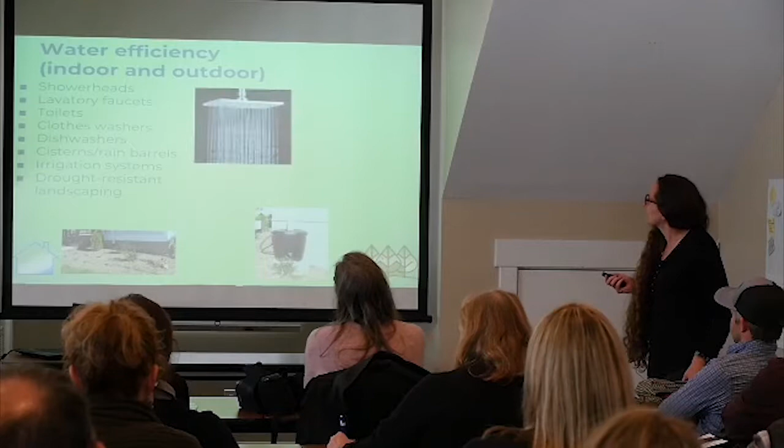The next category is water efficiency. I have some pictures—some things I like and some things I don't like. The rain head shower head is something that frustrates me. As you may have noticed, I have really long hair. If I can rinse my hair with a low flow shower head, everyone can.

I was just having this conversation with a builder the other day because they said homeowners have this idea that they need a lot of gallons per minute to get clean in the shower. In reality, when I travel, if I have to go somewhere with high flow fixtures, I actually don't like to wash my hair there, because low flow fixtures achieve low flow by building up more pressure. So you actually get a higher pressure wash, and it's easier to rinse out my very long hair. These rain heads look pretty and people like the idea of them, but they're not particularly forceful, so they're not great for rinsing. They also, because they use so much water, aerosolize a lot of steam. In homes where homeowners insist on using something like that, you'll start to get window condensation in the wintertime because their houses are getting so humid from this high flow fixture. So using low flow efficient fixtures is important.

Shower heads matter the most because you're wasting both water and energy. Showering uses a high percentage of the hot water that most homes use. A standard shower head is probably 2 to 2.5 gallons per minute.

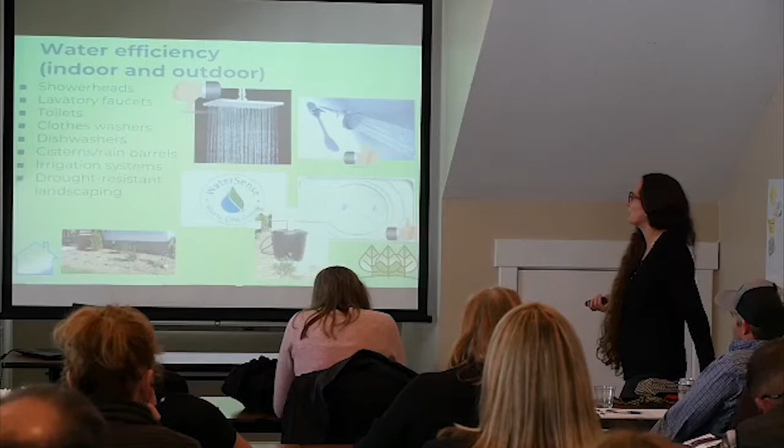That also means educating your designer, if you're working with an interior designer or a third-party design partner like Ferguson's. You want to remind your rep that you want to use low flow. It seems like the more money people spend on fixtures, the less efficient they are generally. That doesn't always have to be the case - if your designer does research upfront, and is good at steering clients, and you give them the budget, that helps. Again, it's not always the end all.

What I found is the worst scenario for these fixtures is when your client goes online and buys a fixture from China from a website. There's no warranty, and no rating, no way to know what the flow rate is. They're not labeled, so that immediately takes you out of the point category where you've got to get available points anyway. So steer your clients away from shopping for themselves in every situation, but especially with fixtures online. Good luck - there are high end fixtures that are efficient.

Not that I've found a rain head yet that's very efficient. There are some rain heads that aren't as bad as others - I've seen 2.5 gallons per minute, maybe even 2 gallons per minute. So you just want to be careful with those.

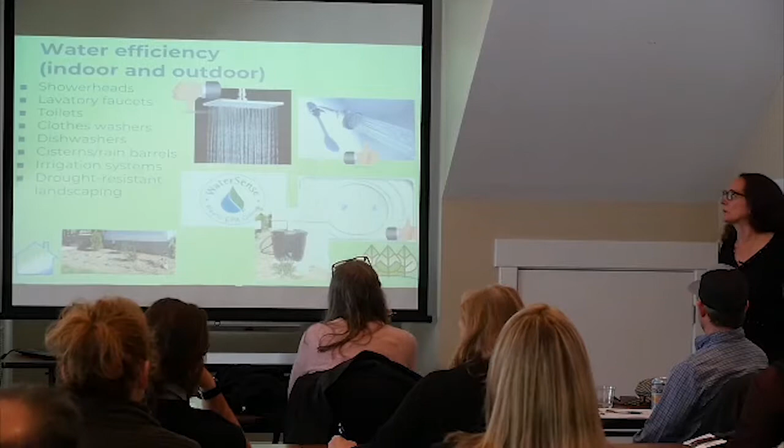Same thing with dishwashers. If you're going to have an irrigation system, having one that can use rainwater from, usually at that point, a cistern - because these rain barrels are great, especially for a hobbyist, but if you're doing much landscape watering and we get a dry spell, they don't last long. So I've got a 3,000 gallon cistern at my house that I flush toilets with and use for landscaping. Most of the time it's completely full and overflowing, but if we get a dry month, I can use the whole thing - I have used the whole thing.

Personally, I think rain barrels are still on that borderline greenwashing kind of aspect, because in an area that is relatively water rich with the amount of rainfall that we get, when we do have a drought, you use them so quickly that it doesn't really make any big impact. And the embodied energy, especially of the plastic rain barrels overall, has got to be far higher than any environmental improvement or reduction.

I think it just depends how you use them. There are some recycled, upcycled options. The right way to look at a rain barrel is if you've got somebody on an infill lot in town who has a couple of raised beds for vegetables, where they're actually going to water them pretty regularly, even during times when we're getting rain, then that's what you use it for, and you supplement with city water if it really doesn't rain for a month. That's the right way to look at rain barrels. But if you're serious about having an actual irrigation system and doing a lot with it, you need to be looking at probably 3,000 to 5,000 gallons, not a 50 gallon cistern or rain barrel.

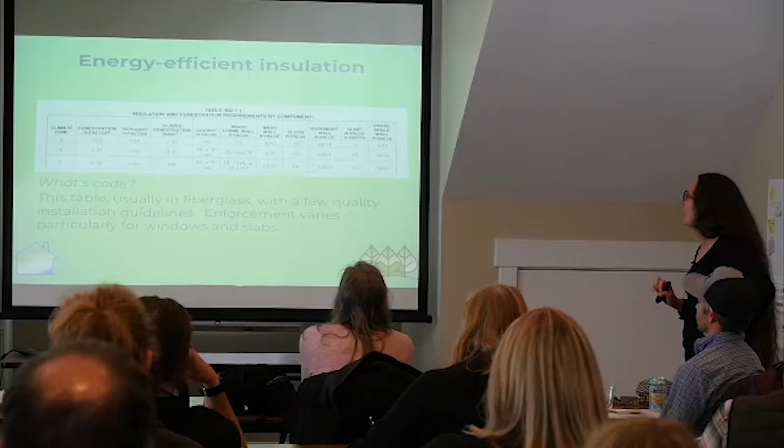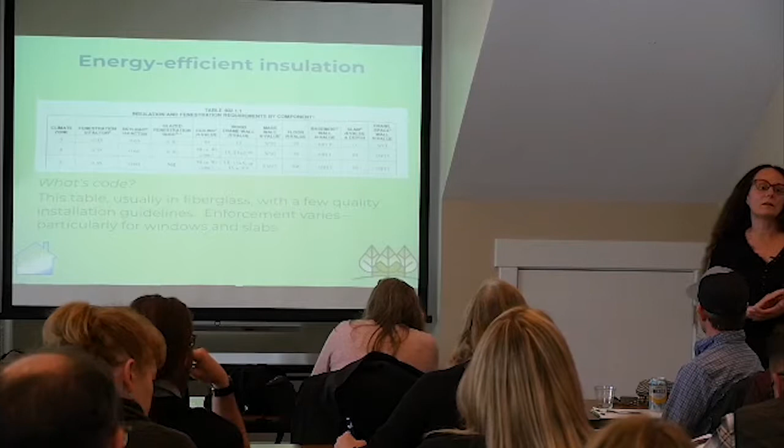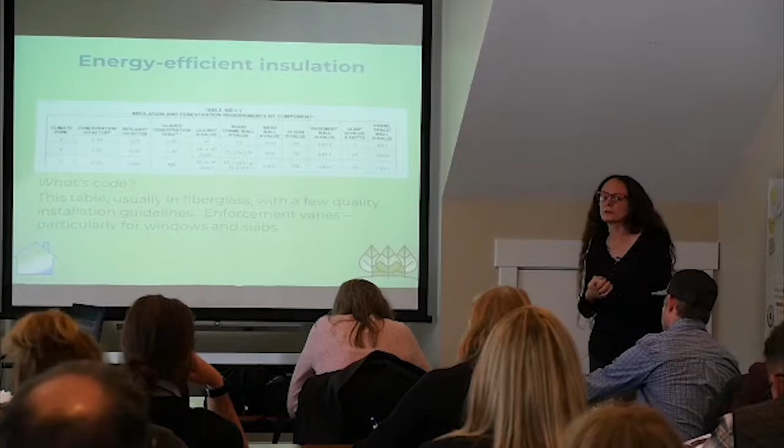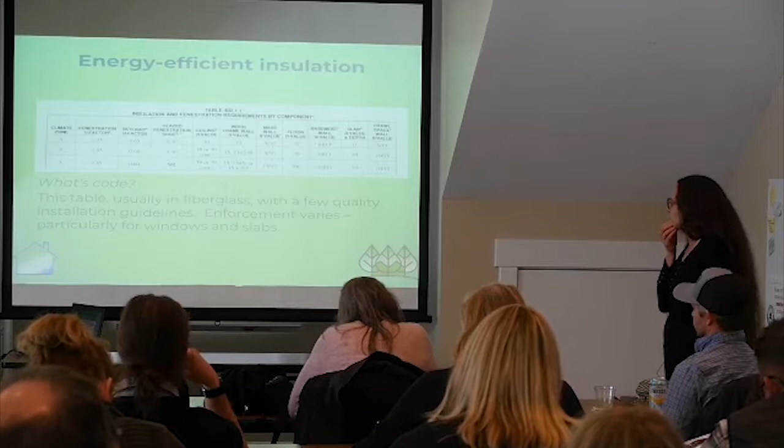So if you're just building to code, you're going to get what's on this table, usually done with fiberglass insulation, with very few quality installation guidelines. All insulation is really sensitive to how well it's installed. You're not going to get the rated performance out of it unless it's installed well. Fiberglass in particular is probably more vulnerable to poor installation than other insulations, although all insulations need to be installed correctly to work well. So one of the things that green building adds is we're looking at how well it's installed.

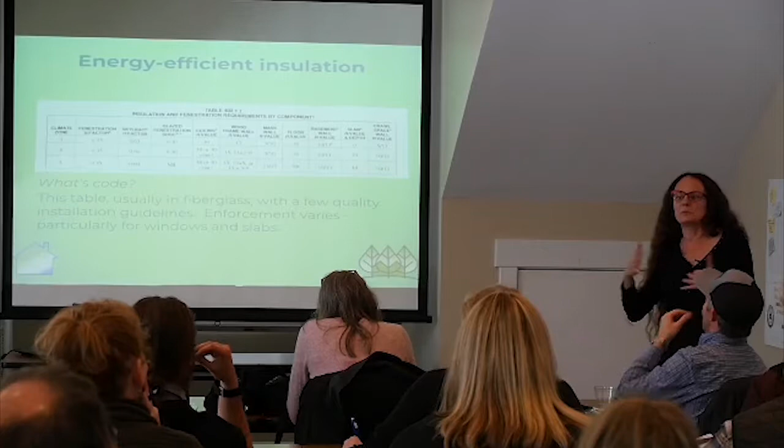And the codes have started to trickle some of this in. So for those of you who are builders, a few years ago they started requiring air barriers on fiberglass and cellulose. That's a how-well-it's-installed issue, and that came from the green programs. We had been requiring that for 10 years, and it became such a thing, it became pretty mainstream. It was pretty cost effective to do, builders knew how to do it, you didn't need exotic supplies, so the code just adopted it.

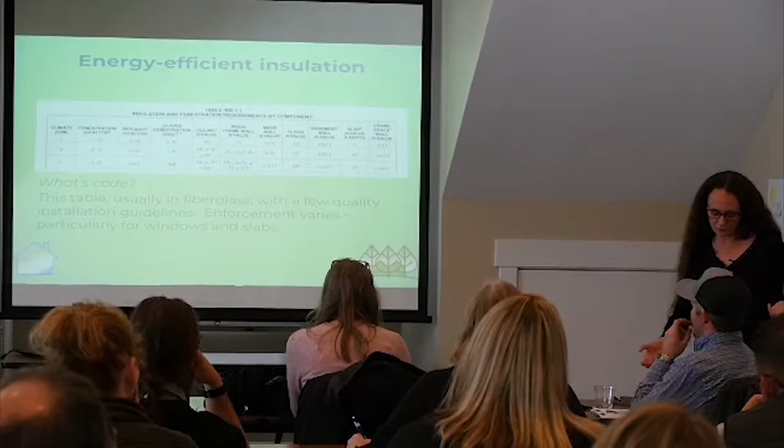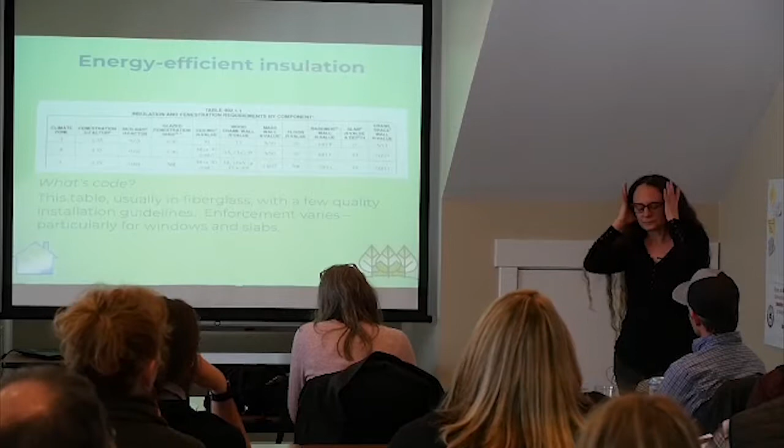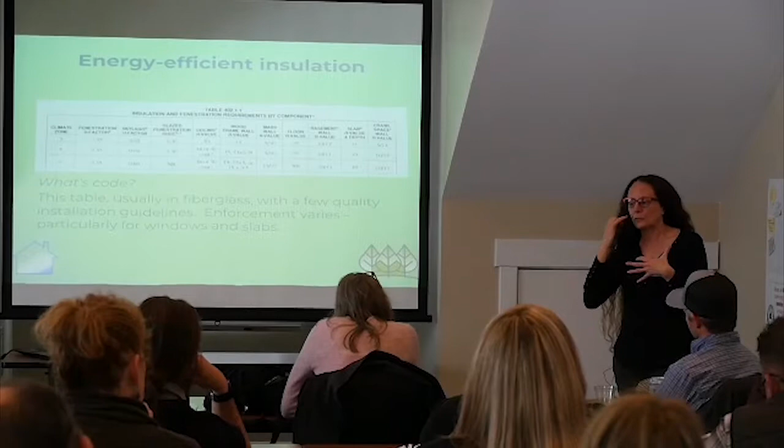How does that work, the air barrier? So fiberglass insulation is like a fleece jacket. You know how if you're wearing a fleece jacket, you're pretty warm until you go out in the wind, and then it doesn't do anything for you? Well, fiberglass insulation is the same thing. As soon as air blows into it, it stops working, just like a fleece jacket does.

So for fiberglass insulation to work properly, it has to be encased on all 6 sides with a hard surface. Normally you've got a stud cavity with 2 pieces of wood and a top and a bottom plate, and then you've got sheathing outside and drywall inside. They're all touching the fiberglass. And as long as that fiberglass is installed to fill the whole cavity and fluffed out, front to back, it's going to work pretty well.

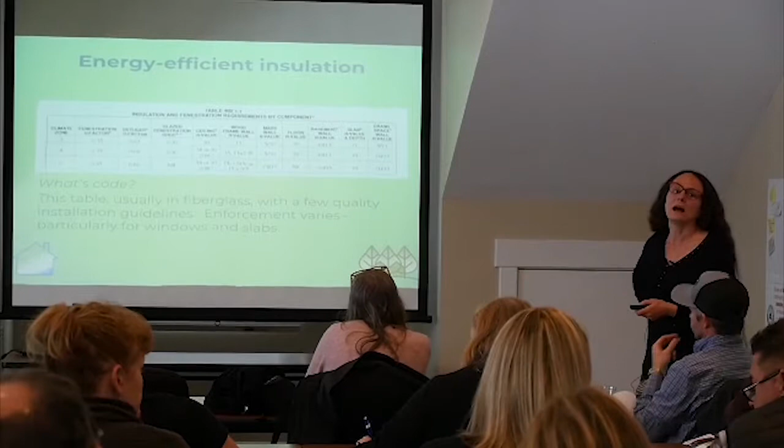But sometimes you have these little cavities in houses that don't get drywall right up against the fiberglass. It happens behind bathtubs, behind fireplaces, under stairs in that little triangular area. And if you don't have a hard surface on the inside, called an air barrier, that fiberglass doesn't work right. So we were always requiring that hard surface on the inside, and eventually code caught up to us. So now if you're a builder, you've got to do that.

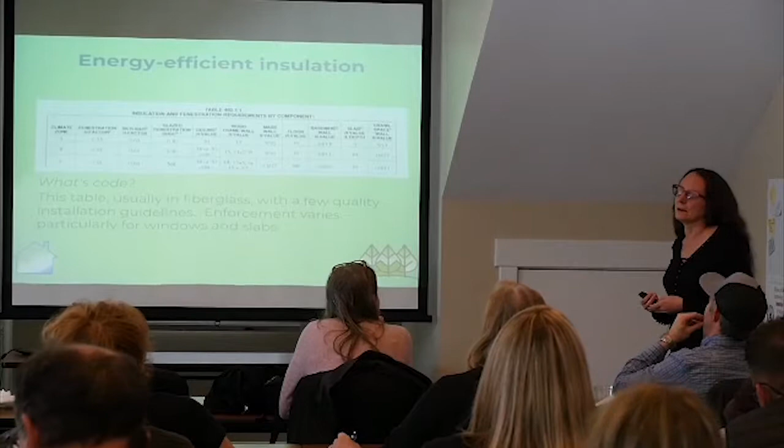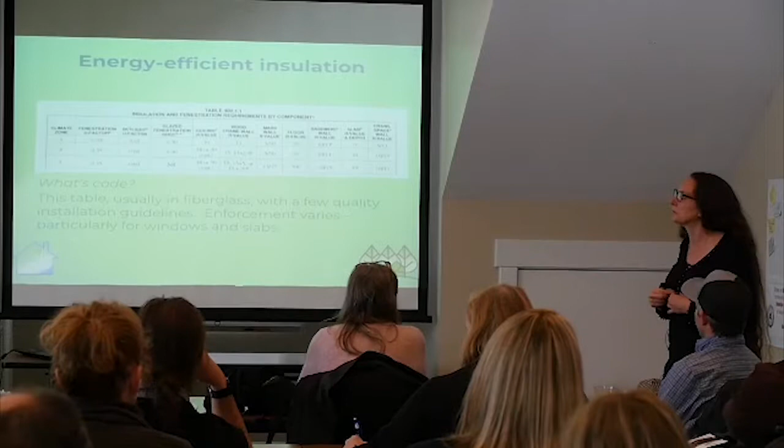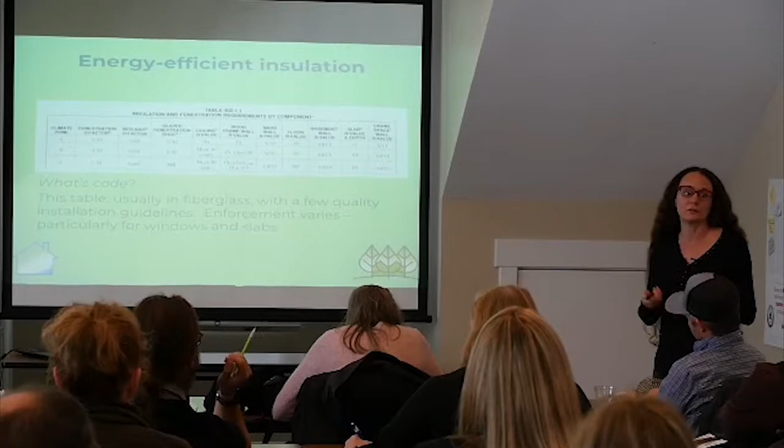Enforcement in the code also varies. So I do on my inspections tag people for things that the code official should have tagged them for. Part of it is I have a different checklist, and I look for some additional things that they're not looking for yet. But I would say the 2 things on this chart that I most tag people for that the code official didn't are windows — the solar heat gain coefficient on windows is something that code officials often don't look at, but should — and slabs. There's a requirement to vertically cover the slab edge with insulation that is in the code that doesn't get done if you're not certifying.

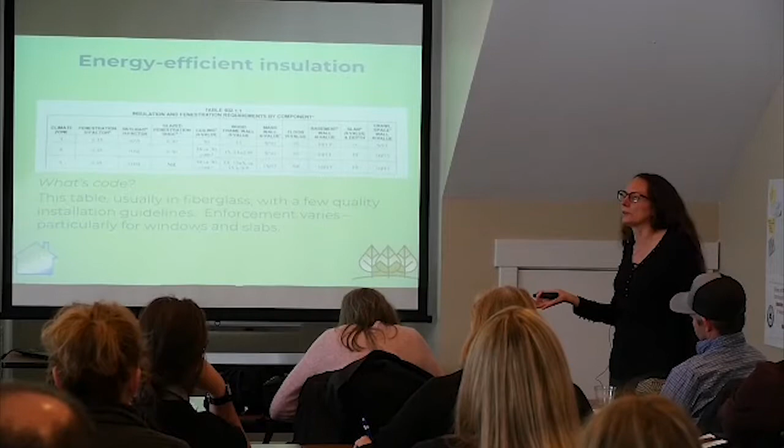I'm just going to be realistic. I have yet to see a house that was not getting certified that actually had that detail done correctly.

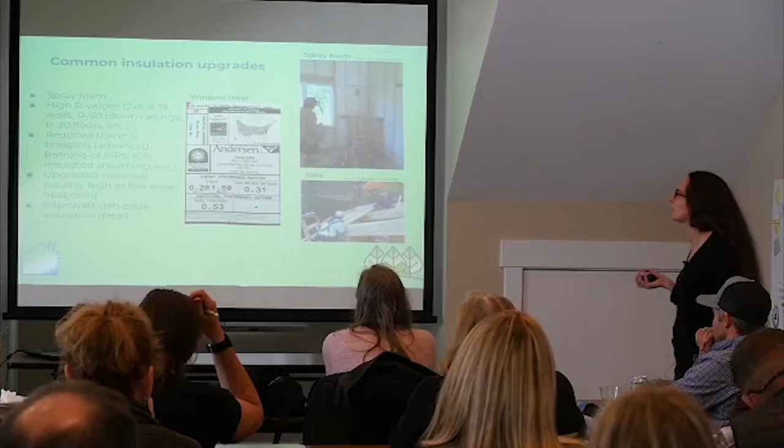I am personally a fan of using spray foam where it makes a house more airtight and does things other insulations don't do. I don't actually think you need to fill your whole wall with it. It's not wrong or going to score badly, but I think I can give you more bang for the buck somewhere else, and we can get walls pretty airtight and make fiberglass products work. There's a lot of waste from open cell foam, the low density, because if they have to scrape it off the can walls, there's a lot of waste, it ends up in a dumpster, which we don't want to do.

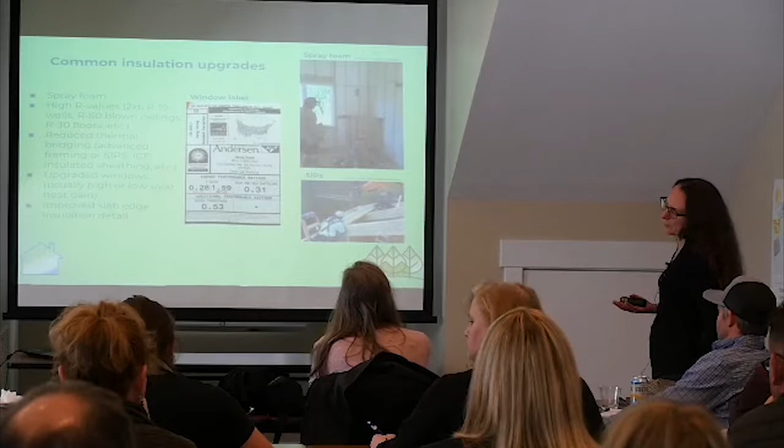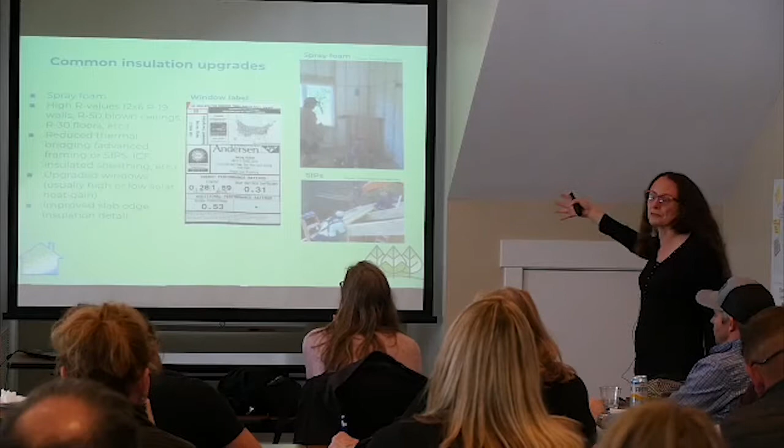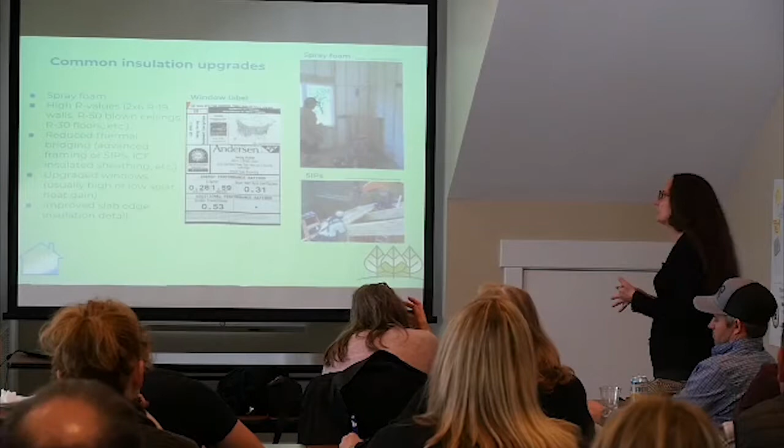Just doing high R values - we talked already about going to 2x6 with R19, which doesn't really cost more than code, which is 2x4 with R15. People who do a vented attic with blown ceilings, code for that is R38, but going up to an R50 if you have the space is a really cost-effective upgrade. In floors, if you have a floor over an unconditioned space, a lot of times that's a 2x10 structure or something. Going up to an R30 batt that will actually fit in the structure is probably going to get installed better and work better, but also not be a big cost upgrade.

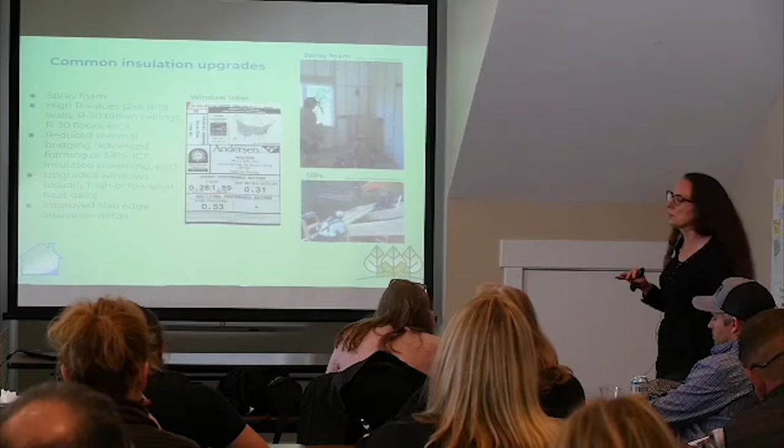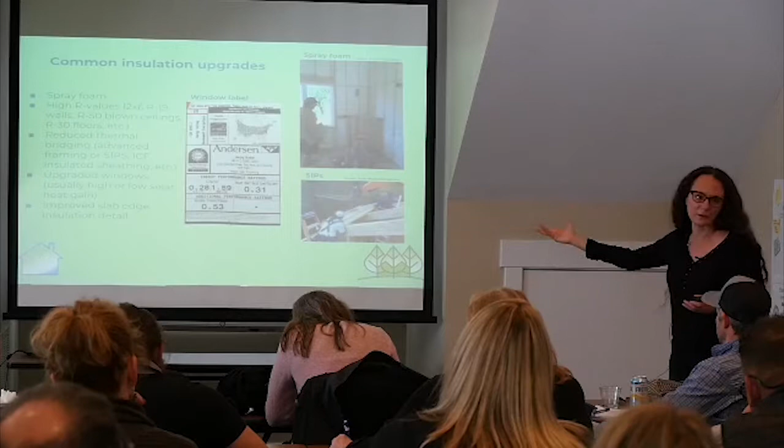So just upping the R values, doing things to reduce the thermal bridging. Thermal bridging is the parts of your wall or ceiling that have structure in them where there's no insulation - basically like on a wall, the studs, or in a ceiling, the joists. That wood is more conductive than insulation, so everywhere you have wood, you're losing energy to the outside.

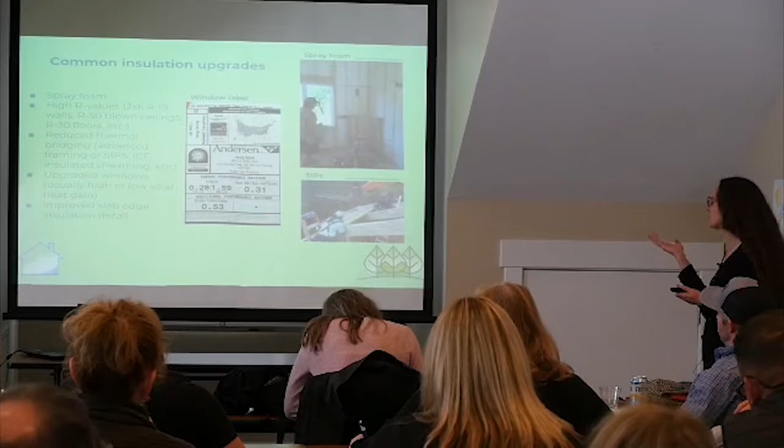So reducing that thermal bridging by doing advanced framing techniques where you can insulate the corners, the headers, and the T-walls better. Using something like SIPs panels, which is the lower picture, a structural insulated panel - like a foam and plywood sandwich. ICFs, insulated concrete forms. Insulated exterior sheathing is getting more popular - the product Zip Wall, the exterior sheathing from Zip, they make Zip Plus R, which has the foam built into it. So there's a lot of ways to reduce your thermal bridging, and they all help.

Upgrading windows, which usually involves having the solar heat gain number either higher or lower. Code is 0.30. If you go lower, you're letting in less of the solar heat that hits that window. If you've got big windows on the east or west, it's probably a really good idea to do that. If you have south-facing windows with good overhangs so they don't take in too much energy during the summer, you might actually want to go high and let more of that solar in during the wintertime.

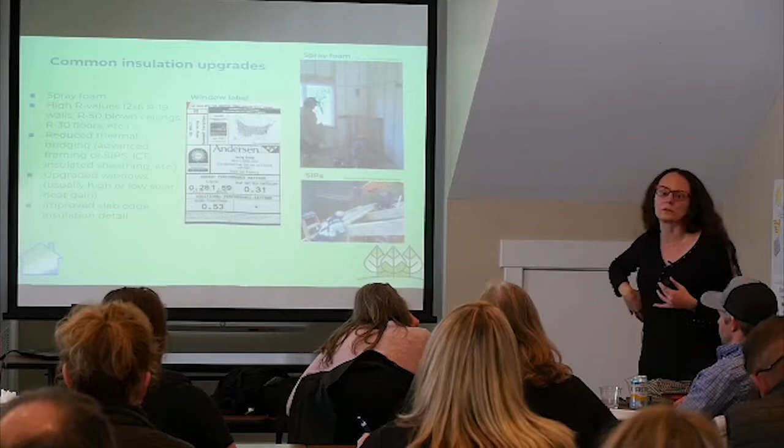To do that, you need to get somebody to stamp something for the code official if they enforce the code on these windows, which they often don't. But that can be done. And then I mentioned the improved slab edge insulation detail - making sure that insulation or heat doesn't leave through that edge of our slab.

Speaking to the window labels specifically - those labels fall off the windows by the time we're coming up to the house, or weather's part of it, but either get pictures of them on the windows installed, or get the specific labels. The way this is enforced is it has to be the specific labels, or like a clear description.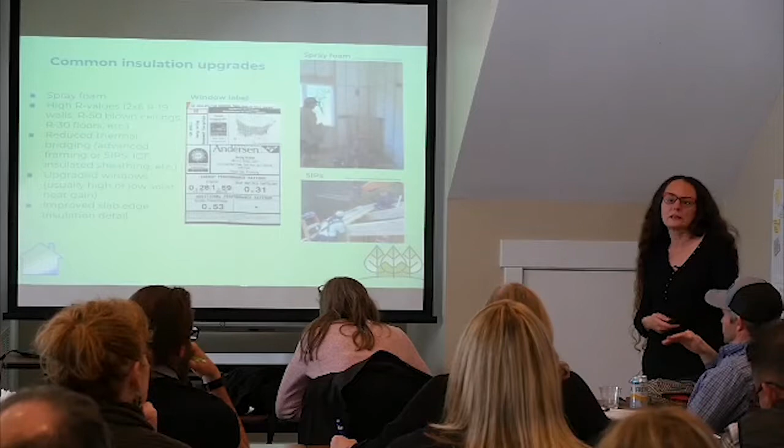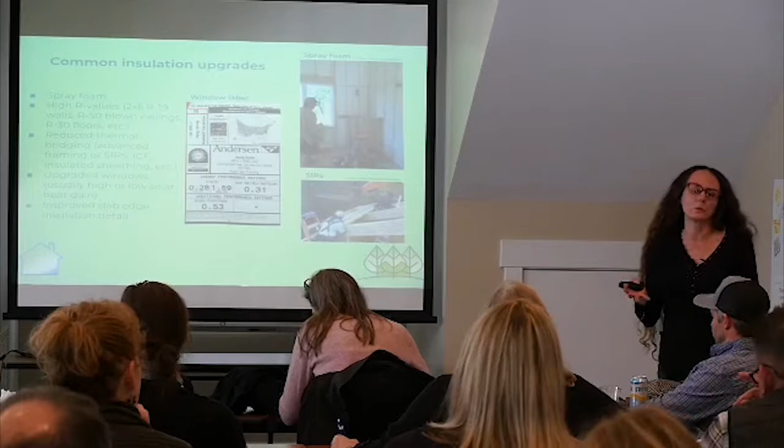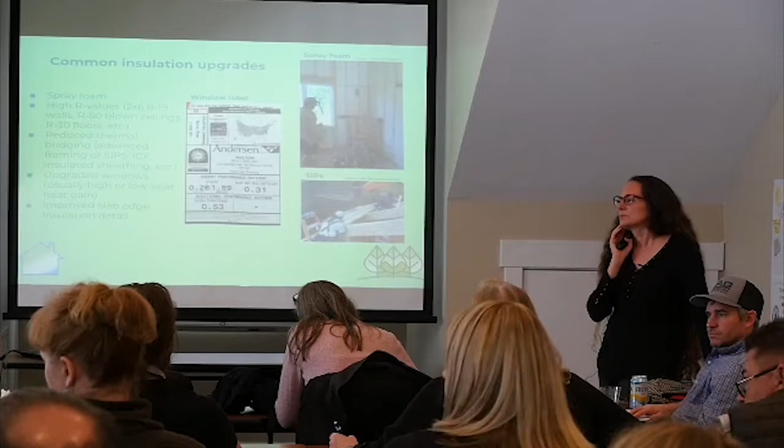So have y'all done any testing on the 2x6 advanced framing method versus SIPs, say ICF panels or something where they have insulated corners? Seems to me like a lot less. We have - our house is built with SIPs, and we did a number of energy models of the house comparing SIPs to advanced framing, or advanced framing with continuous insulation.

When we present those results, the SIP manufacturers just, you can see them getting ready to murder us, because we can usually show similar performance with things other than SIPs that are much easier to acquire and easier to construct. So there's no problem with SIPs, but the cost we paid extra for SIPs, it took longer to put them in, and the energy savings we got out of it, the payback was exorbitantly long. It was in centuries. I've used some that I didn't like.

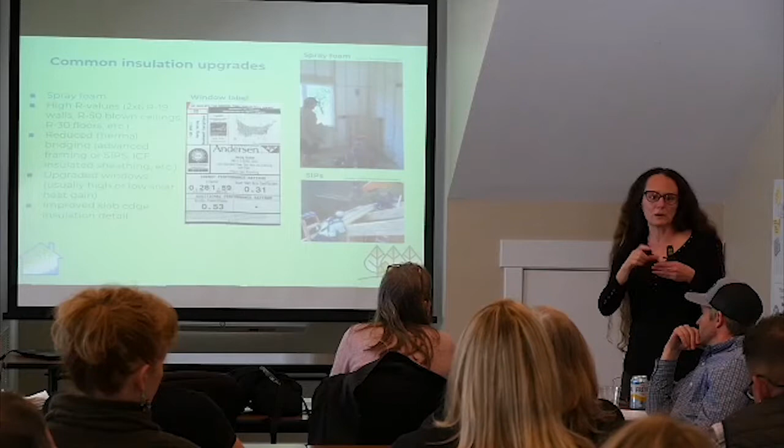This is another one of those examples where you can make a choice to spend more or less money. I think the less money but equivalent performance way is to do a frame wall and put insulated exterior sheathing on it, so you get rid of all the thermal bridging with that sheathing.

Does it matter, say, using zip versus just a standard OSB house wrap? Okay, so that's a great question. Zip versus OSB and house wrap. What I usually tell builders - I have builders who love zip and I have builders who don't love zip. If the house wrap is properly applied, there probably isn't a ton of difference. Where the rub comes in is a lot of house wrap is not properly applied, and in that case I feel like zip is a little more forgiving of your install. So I think zip gets installed correctly more of the time.

So I am a fan of the zip product, but I have clients who don't use it, and that's also fine. One other question on the zip - I'm going to use it on everything we do, walls and roofs, but the coating that's put on it, how healthy or environmentally friendly is it?

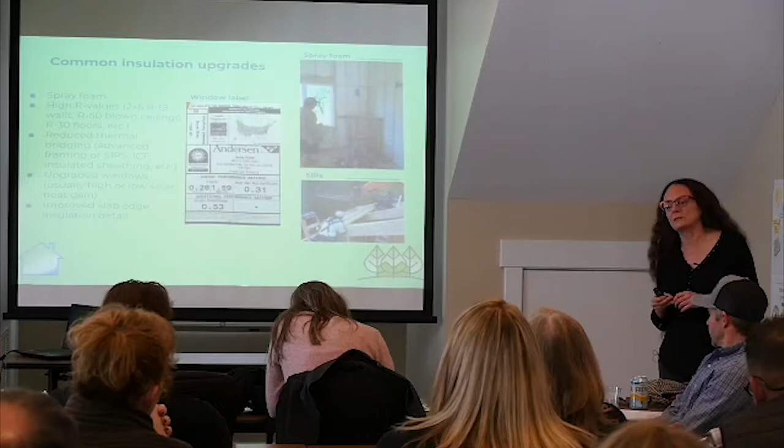I actually don't know the answer to that, but because the coating is on the outside, I think most of the off-gassing of it would migrate outside. Honestly, my gut reaction is there are probably things in a house that are worse for you than that, but just its location makes me less worried about it. Most house wrap is a petrochemical product, petroleum based.

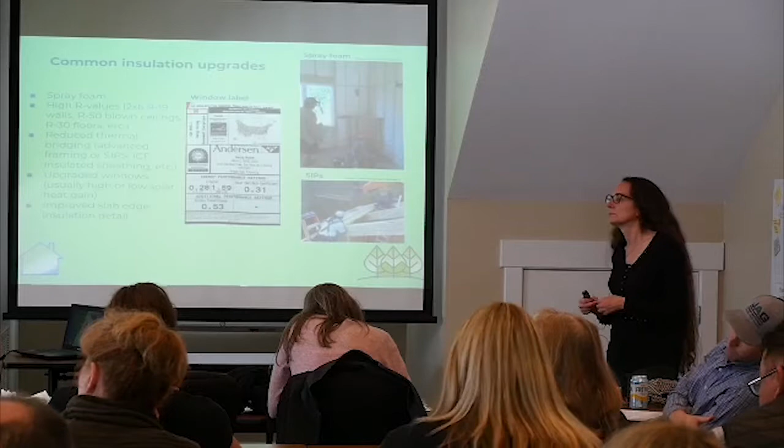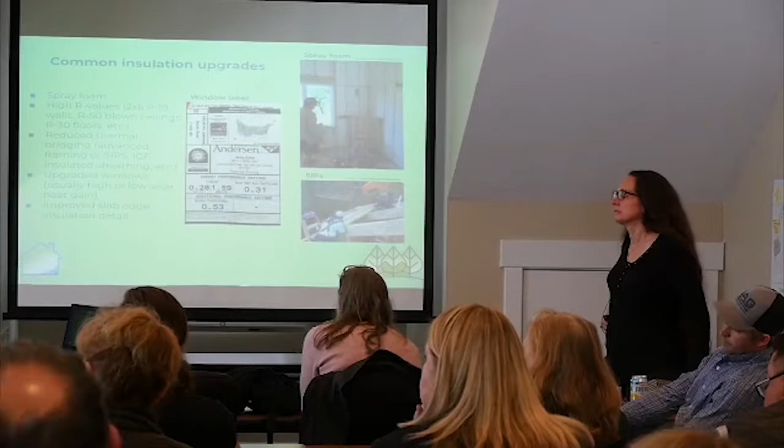The specific question I was going to ask - and this is something that annoys me, I guess, repeatedly - when it comes to spray foam and spray foam installers, the claims that they make on the minimum depth required to install spray foam. They claim all the time that we need an 8-inch, 2x8 cavity to do a ceiling, and it's in the code. And I'm sitting there looking at the R-value per inch, and I'm like, you're not even at R30, and this is not continuous insulation.

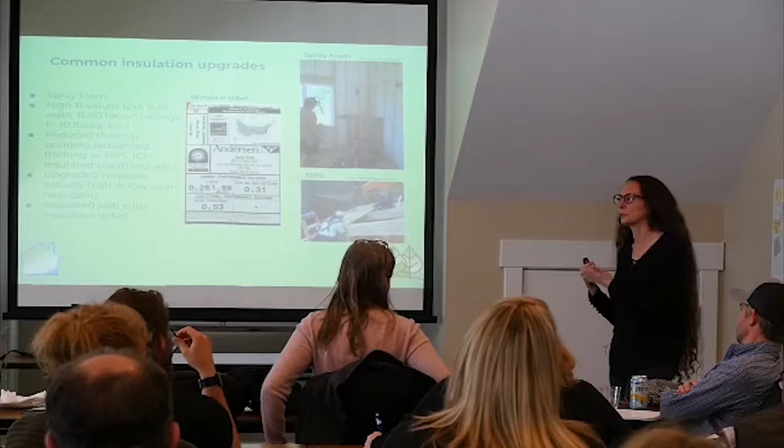That's a good question, that is a really good question. So if you didn't hear, the question was basically how much thickness do you need. A lot of the spray foam salespeople will tell you things that aren't quite accurate - especially for roofs, you have to get close to the R38 that's in code, so I kind of come down both ways on that.

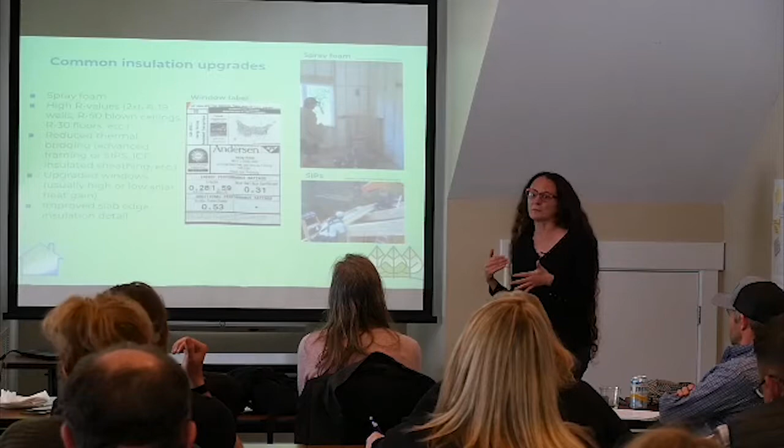In a wall, I really want you to just about fill a 2x6, otherwise don't bother foaming. I get people who build a 2x6 wall and then a foam installer will say you can just do 4 inches here. But 4 inches of spray foam has about the same R-value as fiberglass, and given that I'm going to make you install your fiberglass correctly anyway, give me 5.5 inches of fiberglass in that 2x6 wall and you'll actually be better off if it's properly installed. And an installer trying to get 4 inches in a 2x6 cavity is going to fail.

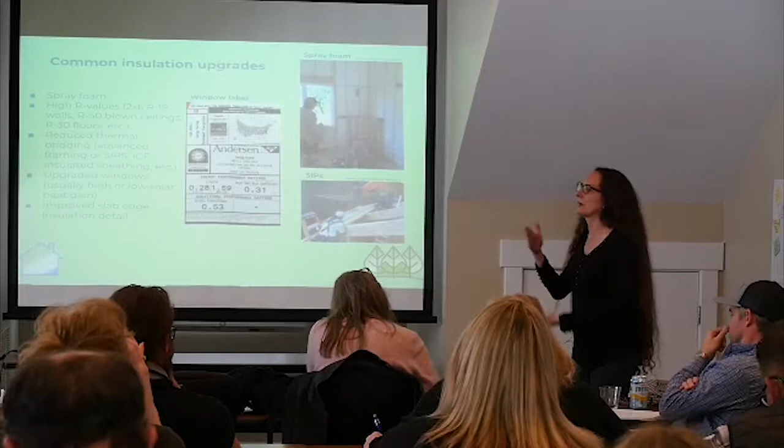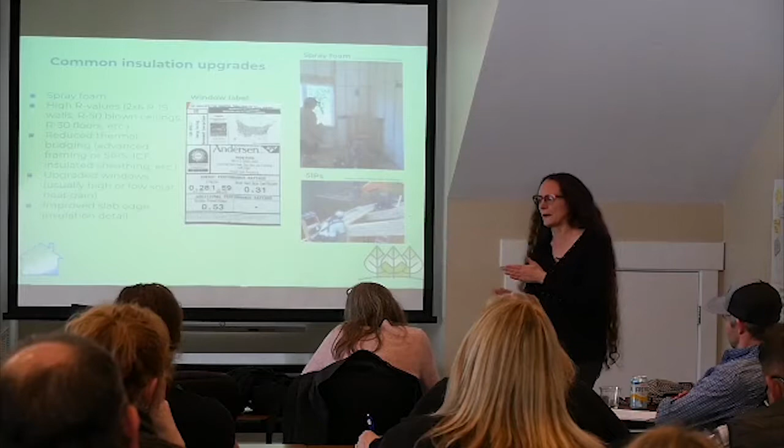So in ceilings, however, I can see both sides of that argument. And the reason why is the R-value of insulation is what's called conduction heat loss - it's how heat moves through that material. There are some really tiny differences, but they're not big, in conduction heat loss moving sideways out a wall or up through a ceiling. And people think ceilings need a higher R-value because heat rises, right? But that's actually air leakage, not conduction heat loss.

So once you're using foam and the insulation itself is airtight, it doesn't really make a lot of sense to be as high as R38 on the roof and still code at R15 on walls - that ratio is off. It is what it is in the code for a few reasons. One reason is it's cheaper to put more insulation in a roof because you usually don't have to frame it differently, you've got space up there.

Same thing with floors - they can go up to R30 and the HBA isn't going to complain about the code because floors are usually at least a 2x10, you've got room. But when walls get more insulation, that adds to cost. Builders don't want to do it. So the code has evolved that way.

The other thing is, when you have a vented attic with a flat ceiling and blown insulation, there's a whole bunch of reasons that blown insulation doesn't work right, and none of them have to do with R value. But in a way the code has just upped the R value as an easier way of trying to make up for why it doesn't work right. I mentioned fiberglass needs a hard surface on all sides. When you have blown attic insulation, you don't have a hard surface on top - you're not decking all your attics. The top couple inches of that insulation isn't working right, so it's a throwaway.

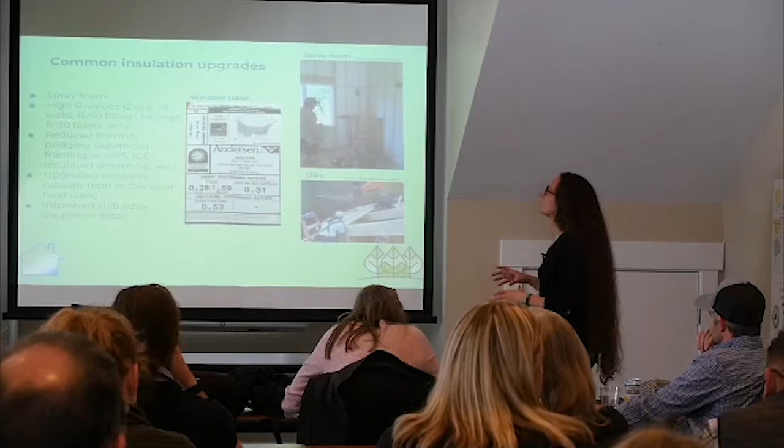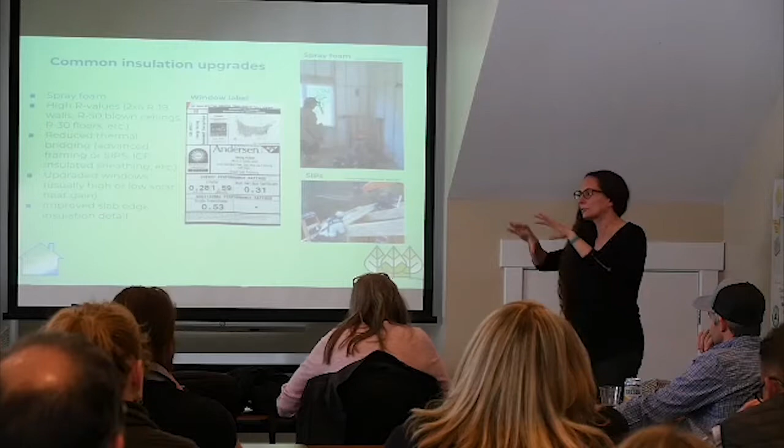Wherever you have air leakage it just leaks through that fiberglass - it's your fleece sweater effect again. So that's air leakage, not R value. Wherever you have an attic hatch, and you're missing insulation around your can lights - there's a lot of reasons why R38 fiberglass doesn't work particularly great in attics. Also, if you're doing a vented attic with fiberglass and you've got ductwork or HVAC up in the attic, all of its leakage and losses are to the outside.

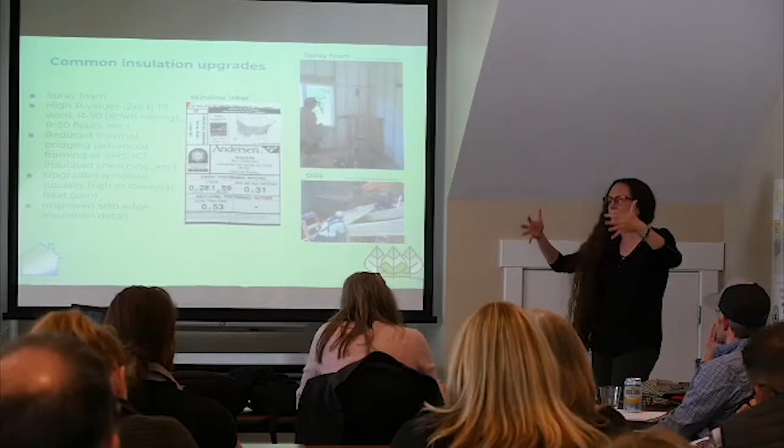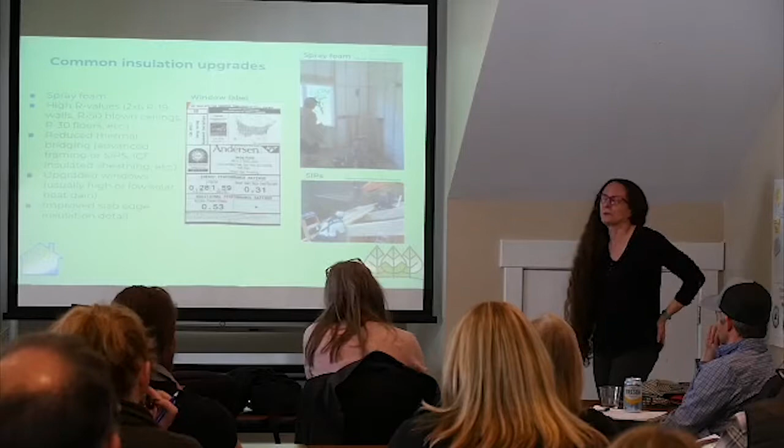So if you move to a spray foam roof deck, the insulation itself is airtight, so you're losing less heat that way - it's more continuous. Your HVAC that's up there is now in conditioned space, it isn't losing anything. So I actually agree that in the case of spray foam at the roof, you can go lower than R38 and get equivalent performance to blown insulation.

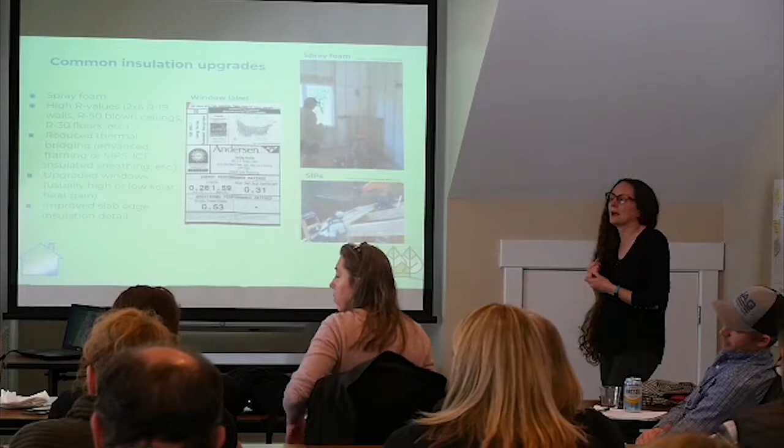But I've directly had spray foam installation companies say that, with a minimum of a 2x8 rafter, we can get a code compliant roof system, and it was all spray foam at 3.7. They do it with the trade-off - instead of prescriptive, they use the performance modeling.

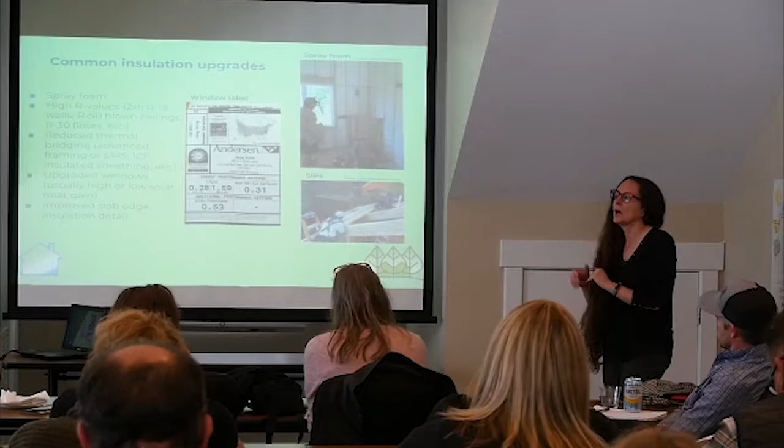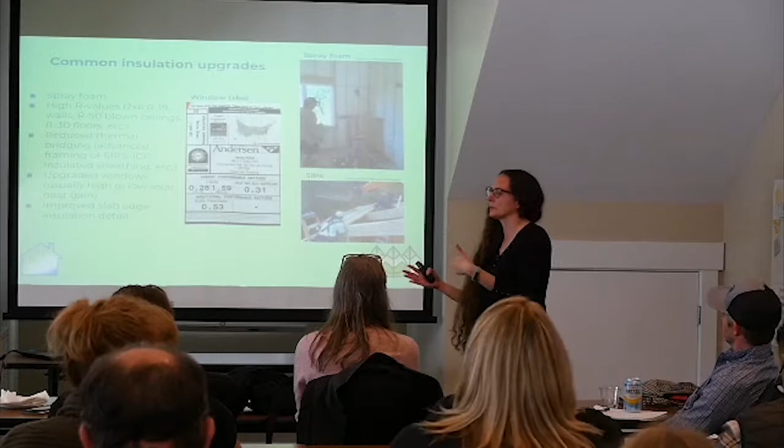That's going to get harder to do in the new code, but it will still be possible. I'm okay with it. I tell people I want to see at least around R25 with spray foam, which is a filled 2x8 - I think that's kind of the minimum. But that argument, in the case of walls, I think is garbage. In the case of roofs, it has some merit. I understand needing air sealing, but R value does still matter.

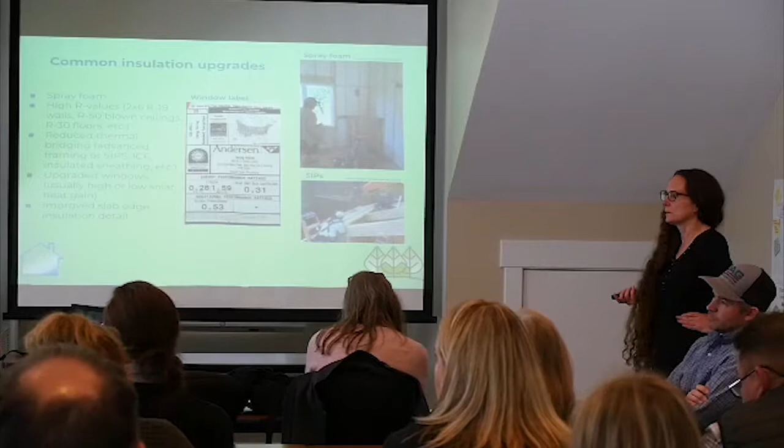A quick note on SIPs - it's probably the best solution for something like a timber frame style or timber frame hybrid, where you're doing tongue and groove on the ceiling or exposed timbers, because that's the enclosed ceiling versus framing an attic and filling it with something. So if you're doing TNG on a ceiling, you've got to either foam the roof or do SIPs or something. You cannot vent or move to a conventional ceiling with SIPs versus multiple layers of rigid board - well, more install time for rigid board. It's really about the R value at that point.

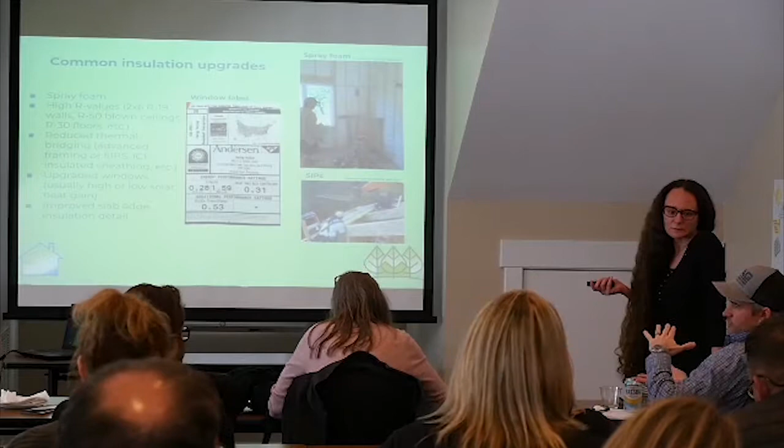Yeah, I was saying it's about the R value at that point. SIPs, if you've never done it before - if you're doing multiple layers of solid foam, you're creating the same thing. But I don't want to get too into SIPs because they're kind of a niche material. Really, the point to make today is no, you don't have to do that - depending on the house, a lot of people do spray foam. If you're building a house like the one from Jag that Rob showed, where the upper floors build into the roof line, you almost have to.

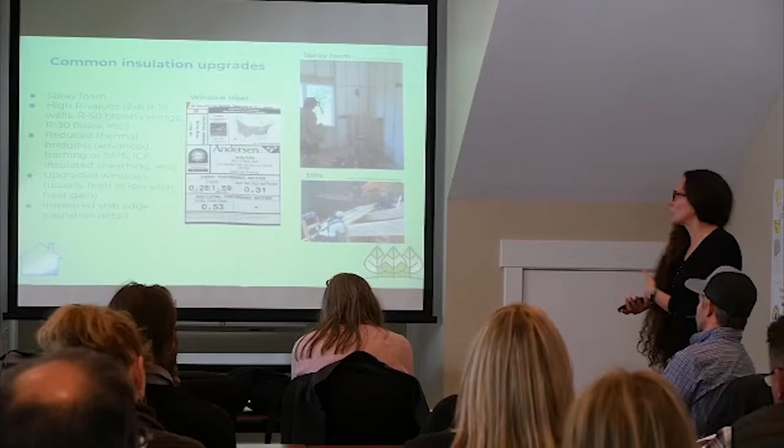If you've got a real simple flat ceiling, there are ways to air seal that ceiling and do blown insulation. We've walked you through it for your specific house. Here's just some photos that illustrate proper installation.

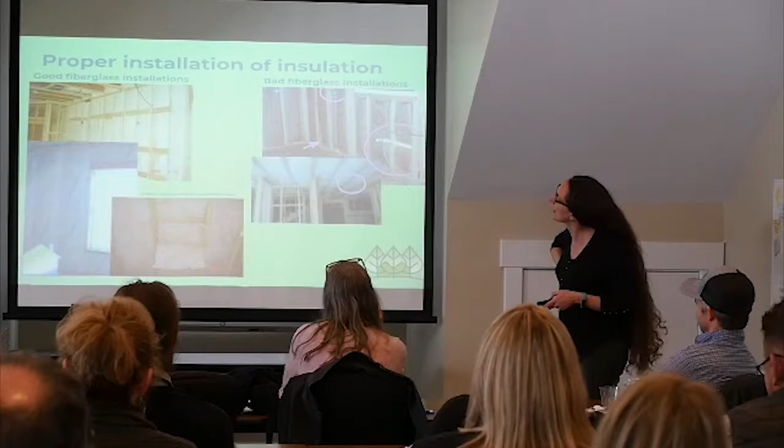So with fiberglass, something we're looking for that the code officials don't necessarily check is that it's fluffed out to fill the whole cavity, front to back. Here it's split around wires. If it's paper faced, you want it face stapled instead of inset - although if I pulled back that paper, it might look like garbage behind it because sometimes they do that. But you want it to look really neat and fluffy.

Here's some bad fiberglass - it's compressed around these pipes and wires, and it's inset stapled.

It's pushed in—you can see the sides of a lot of studs. This insulation in a floor, you always want floors to be pushed up to touch the subfloor above if they're fiberglass. This is probably a 2x10 with an R19 where it's hanging down. But here you can see it's pushed up, so either this is compressed or the whole thing's hanging down. Either way, how do you get that up there?

Those tiger teeth don't stick in the TJIs. This is why I really like to do R30 batts, because then your batt and your floor are the same depth. So yeah, they've got to either use tiger teeth or come up with something else.

The worst is when you have an open web truss, because you've got 3.5 inches of structure. I would really like you to spray foam an open web truss. With fiberglass, I'm supposed to make you do grade 1, but I don't actually think a grade 1 is possible with fiberglass in an open web truss, so it can be all it's going to be, and it doesn't look great.

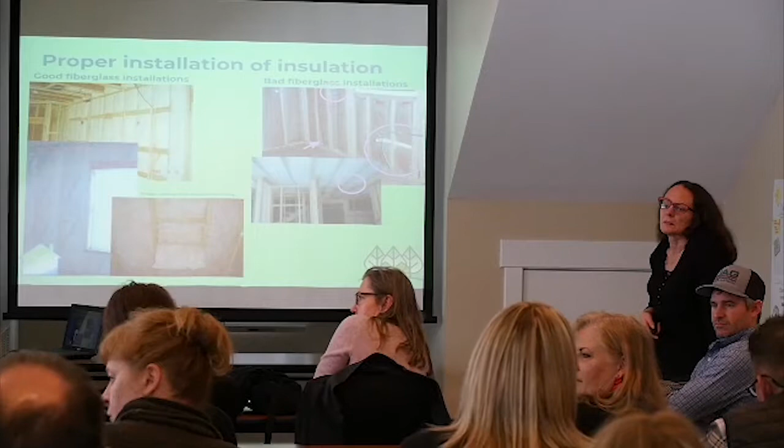Don, you've probably got some experience to share here. Well, the TJIs, relative to 2x material, the space is wider. Is there a problem sticking nominal 16 on center insulation in a TJI 716? I think they have other widths, but to be honest with you, I think the way I've seen it is like a 9—I think they make a 19, and then I think they end up compressing it a little. I don't love it.

I think the bigger picture of what having a rater helps so much is really—in this picture here, you see the basement, there's living space above it, most likely. You really need to think about where your envelope actually is. If you've got mechanical equipment down here in the basement, and you've got an insulated slab, then really your envelope is the walls of those basement walls. So it opens up a bigger picture—it's like defining what your envelope is, and that's a big part of this process.

I'm actually a big fan of the superior walls we talked about before, especially if the homeowner might finish the basement later. If you do superior walls, you as a builder are giving the homeowner a complete, tight, insulated-to-code thermal envelope. Then they can mess around with drywall or whatever they want in the basement, but you've given them an envelope that's up to code and ready to go. So I'm a fan of those.

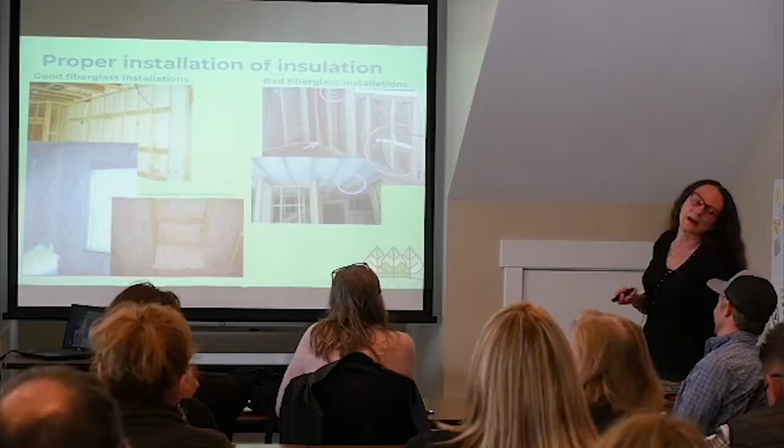Okay, energy efficient ductwork. This is really important because air ducts are the way that a lot of conventional homes lose energy. If you have ducts in a vented, unconditioned attic, in an unconditioned or vented crawl space, or in a basement, less so. Even if you insulate the floor above, there are reasons why in our climate you tend to recover energy from duct losses, but you may also be recovering some cruddy air from your basement that you don't want to breathe. Really, anytime the HVAC unit is outside the conditioned envelope, duct leakage matters.

The estimates you'll see published are that duct leakage is like 15% of your heating and cooling energy, but the truth is that's kind of an average, and in some houses it's way higher, like 60%. Then in some houses—Matt and I own a house in Montford that wasn't green certified, but it just happens to have all the ducts in conditioned space, so it's actually a pretty green house, just by accident, because the duct leakage is all in conditioned space. And you can get comfort problems.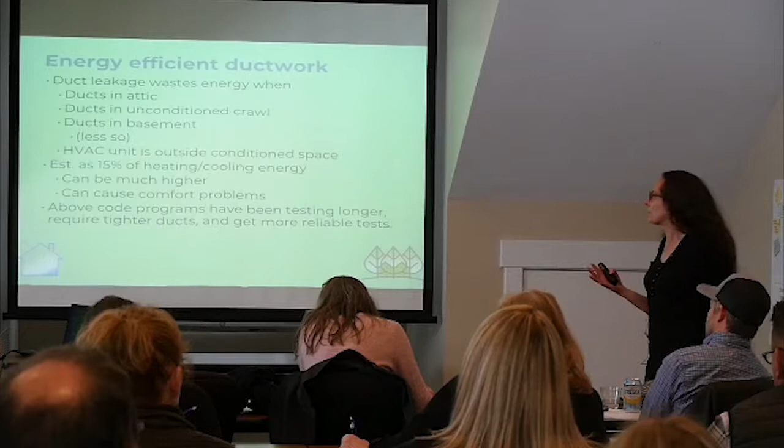If you have a lot of duct leakage, you might not be getting the supply air you want to a space. I did a research project once where we did duct sealing and homeowner surveys. One of the first things we found in a house was that the duct to the living room had come disconnected in the crawl space, just blowing supply air into the crawl space. We hooked that back up, and the guy said he was able to knock his thermostat down 2 degrees in the wintertime because he'd been jacking it up because his living room was cold. Now that he's actually getting air in his living room, he can knock his thermostat back down. So comfort problems go along with this.

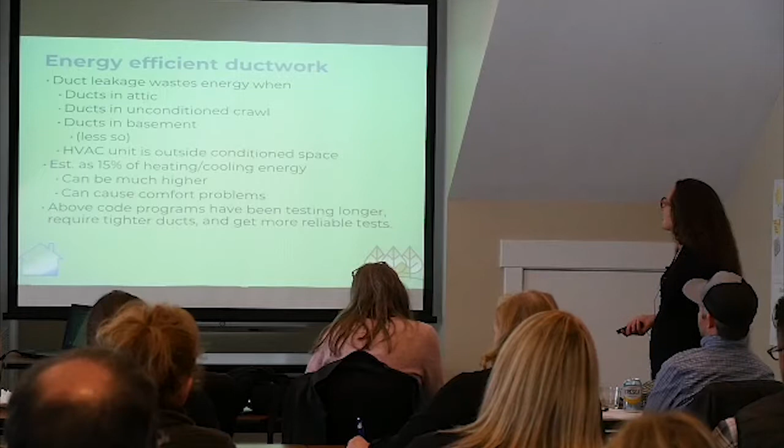This is one of those ways that these above-code programs feed into code. We have been testing ducts longer, we've been requiring tighter ducts, and we get more reliable tests because we use a quality assured third party. So home energy raters, which is what Matt and I are, 10% of what we do is checked by somebody else in a paperwork way, and 1% of what we do is checked by somebody else going out with equipment and redoing what we did. If either of those processes find that we didn't do our job right, we can get sanctioned and eventually lose our ability to be home energy raters.

If you're just building to code and your HVAC guy is testing, I've seen a lot of hinky results from HVAC guys. I think a lot of guys have the equipment and don't actually know how it works, because the numbers don't make any sense. Then I'll duplicate test it and I don't agree at all. There's no quality assurance oversight on HVAC guys testing their own work.

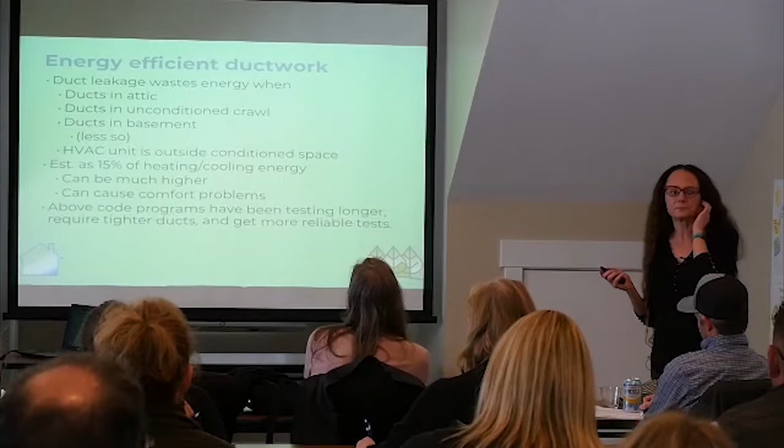Is there any difference on the green side if you use metal in the ductwork versus flex? That question was about metal versus flex. There's no limitation on what material you can use, and most people do use a combination of metal and flex. I like to at least see metal trunks with flex runouts. I don't love ductboard—I'd rather have those trunks and plenums be metal. But it's really about the sealing of it, and if it's outside conditioned space, also being insulated enough.

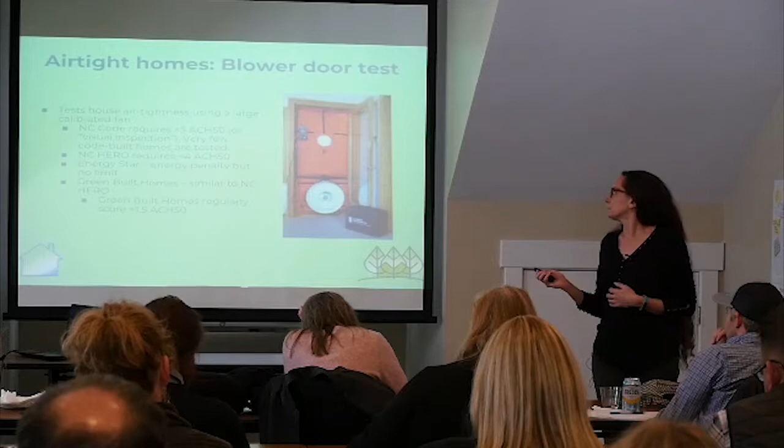Why build tight houses? Something builders say to me a lot is you can build a house too tight, a house needs to breathe. A house may need to breathe, but not in that way. You don't really want air moving through your building envelope in this climate, because air carries a lot of moisture here. So if air is moving through your walls, roof, and floor, that moisture can condense at various times in those assemblies.

I also liked what Rob said - where's that air coming from? If you look at existing homes, how many attics, crawl spaces, and basements do you want to be breathing air from? Garages that might be attached - I want to know where that air is coming from.

The other thing that happens is if you build a leaky house, yeah, you're getting outside air, but you get more when the weather's severe - the most when it's 0 degrees outside or 100 degrees outside, and very little when it's milder. So it's not regular air that you can count on. Air leakage accounts for like 25 to 40% of heating and cooling in American homes, which is a lot, so there's a lot of savings there.

It's way cheaper to bring in intentional ventilation air, and leaky air brings in a lot of moisture and dust. Sometimes when I'm talking to people I feel like this isn't really impacting them, but these are big enough holes that things like mice and bugs can come in - I see a fair amount of pests that come into houses through these same holes. So building tight houses is actually really important.

Also in the energy efficiency category is your heating, ventilating, and air conditioning. Here are some types of systems people use. Geothermal heat pumps generally happen in larger homes that want to do radiant floor. Ductless mini splits are kind of coming into their own, generally for smaller homes with really open floor plans where you can make those work. High efficiency heat pumps - the standard heat pumps now have these higher efficiency variable speed versions that are real similar to a big ductless mini split, only with ducts. Furnaces still have their place, especially if you're on a generator or going off grid. Natural gas boilers for radiant heat if you have natural gas available. I don't like to do radiant heat off propane because it just costs so much.

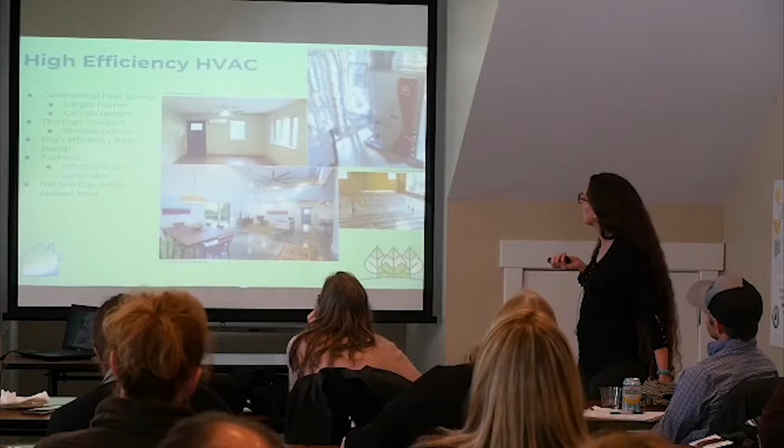Efficient hot water is also something you're going to have to think about - it has a huge impact on house performance. Water heating is in the 20 to 25% range for overall energy performance. The heat pump or hybrid water heaters that Rob mentioned earlier are becoming a really popular choice. They look like a regular electric water heater with a little heat pump unit on top. They basically suck heat out of your house and put it in your hot water, and when they do that, they dehumidify the space they're in - so they're really great for basements.

And if you package them into that Duke Whole House rebate, you can about pay for the water heater.

Something to know about that too is if you have a small mechanical space and a finished basement, or a weather-stripped sealed door, usually a small mechanical room doesn't have enough air or makeup air for this to work effectively. So then you have to have transfer grills so the air's communicating, which is a benefit. The pressure in the basement is drying out that moisture. You can also duct them to an adjacent space or something like that.

The one place where I really haven't been able to find a solution is if you have a short crawl space. Nobody makes a low unit, they're about 5 foot 6 inches tall. So you got to either dig out a corner or find a way to bring them upstairs.

So geothermal, if you're doing that, there's a de-superheater. Gas tankless, I would say of the efficient options for water heating, the heat pump water heater and the gas tankless are the main ones. So the gas tankless and the heat pump water heater, from a CO2 standpoint, are about equal in terms of CO2 emissions.

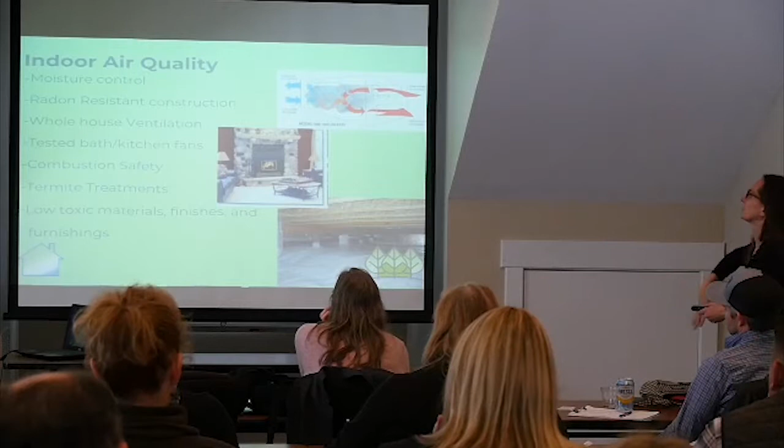Termite treatments—if you don't know, there are some low toxicity options like trap and bait, or there's a borate spray that's similar to regular sprays but less toxic. And then low toxicity materials, finishes, and furnishings. There's whole categories of things that, if they're formaldehyde-free or low VOC—CARB compliant is like a California compliance for low formaldehyde—so if you can buy things that are CARB compliant, those are good.

This is a picture of a sealed crawl space, which you don't have to do, but you get a lot of points for doing it because they are less prone to moisture problems.

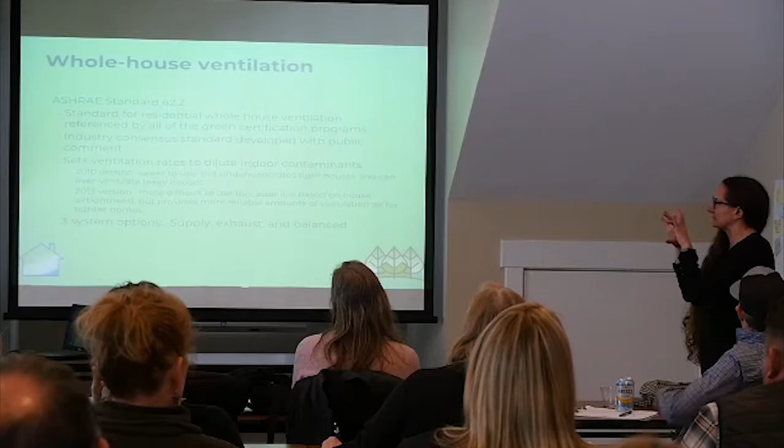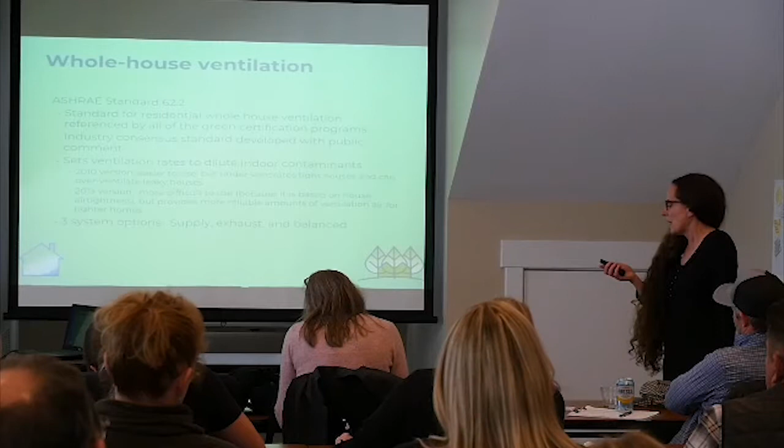Whole house ventilation, given the time, I'm not going to say too much about it, other than we already talked about why your house needs to be tight. Now that your house is tight, we need a way to bring fresh air in. You can do that with a balanced system like an energy or heat recovery ventilator. There are also cheaper ways, the most common being a whole house exhaust that runs continuously. So if you're a builder, this is something that if you start working with us, we will spend a lot of time talking about and making sure you have a strategy.

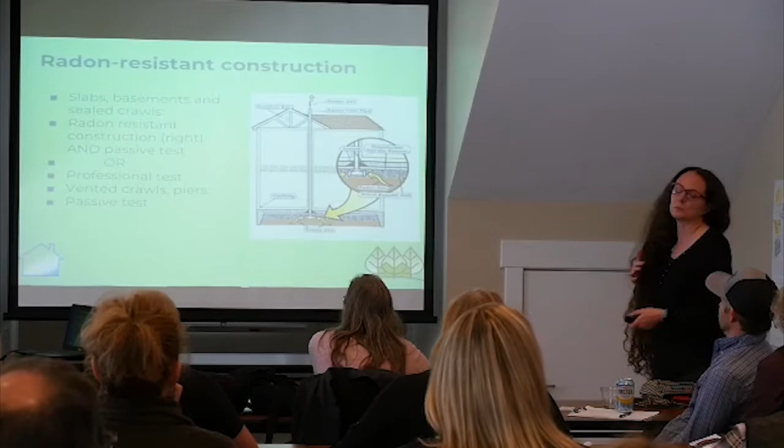Radon-resistant construction is most important in homes with slabs, basements, and sealed crawl spaces, but any house can have radon. This is just getting a pipe under the slab and out the roof to passively vent radon from under your slab. Doing this is really smart here because we do have a lot of radon, and doing it after is really expensive. Green Built does require that you test your radon, and if it's high, you have to mitigate. If you do this passive system, you're less likely to test high, so it's really a good thing to do.